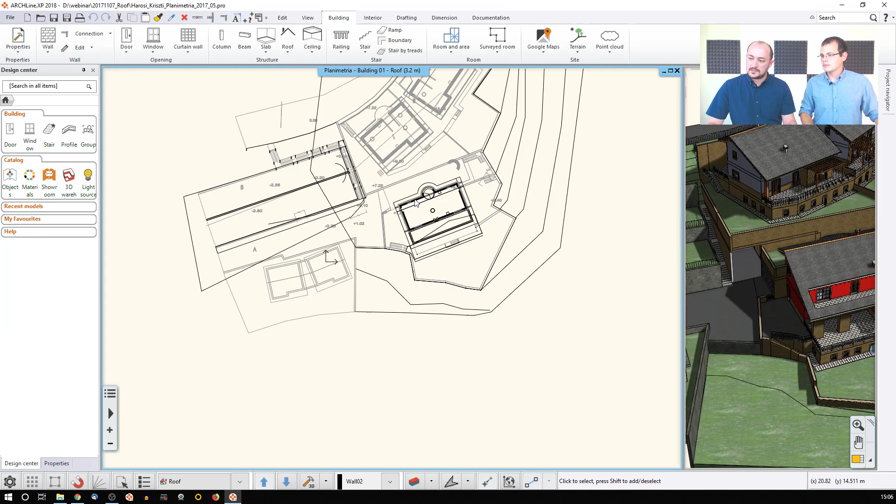So what you see here now, this single building is highlighted, and this is where you can work. This is what you can select. This is what you can edit. I will work on that later.

If I would like to work on this, I need to go to the settings of the levels, the floors. Here I can see these are my floors, and there is a button where you can set up or switch between buildings if you already have existing ones. By default, the software will always create at least one building in the project, called the default building. You can rename those buildings, add new ones, and remove content if you want.

Actually, there is one called the surrounding now, and that contains these tiny buildings, so I just click on that. This way I'm switching to that building, and when I click OK, it's pretty similar to the floor selector itself. Yes, it happens the same way.

You just select the building itself, say OK, and now the software is working on something. This means you can separate your models into several parts, and you can also focus on what to see in the 3D, and this happens here.

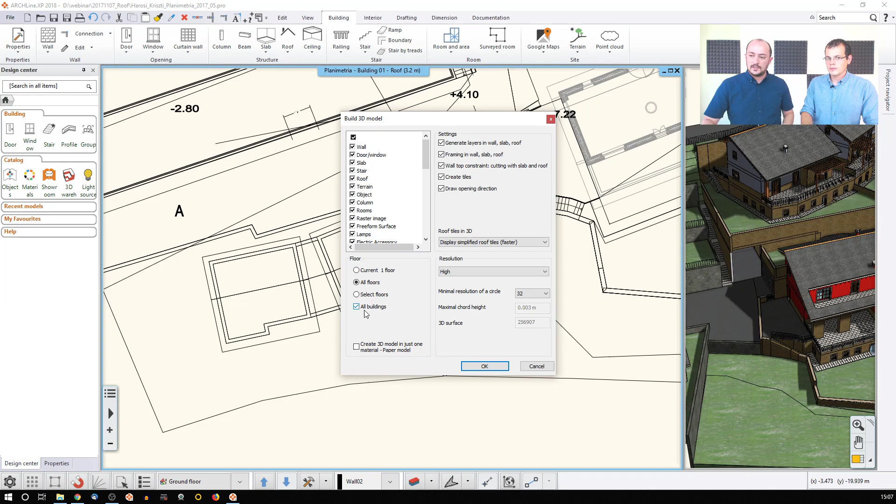With this 3D update button, there is the build 3D model button here, and this allows you to set up whether you'd like to see only one floor, all the floors, or all the buildings. This way, whatever I do, I will always see the full content, the full project. But if it's a large project, or you just want to focus on the single building you're working on, you can disable this all buildings switch, and then you will see only those parts highlighted, that are editable, in front of you in the drawing.

So what are the first steps here, once you have the building selected? Now that the building is selected, I'm waiting for the software to update the 3D, and then I'm able to access the content.

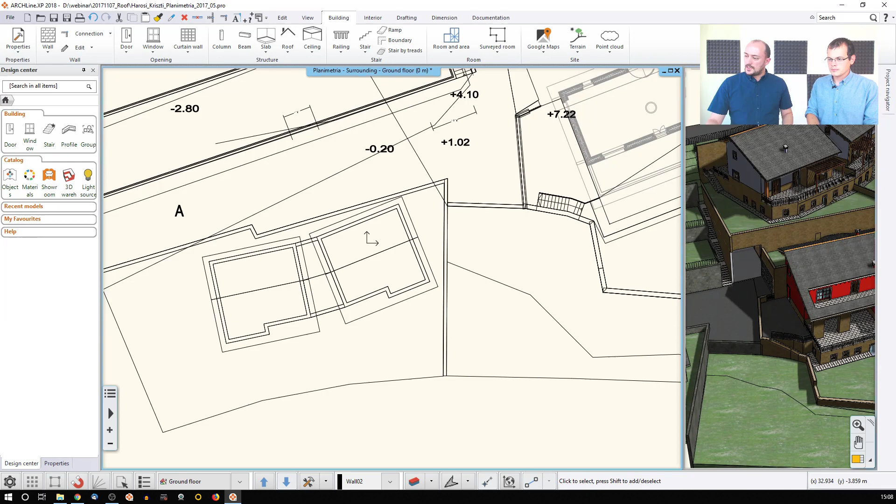Let me quickly go here and show you a few 3D views I have set up, and I will also turn off the shadows for now because I don't need those yet. This we will need later. So I will just quickly turn off the shadows, switch off both, and it's a bit clearer now.

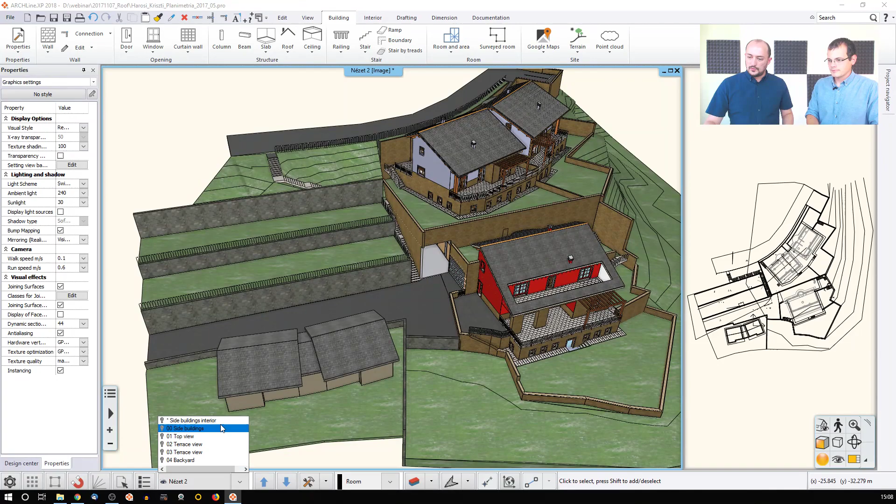I just go to the side buildings view, which I have saved earlier, and it's here, this one. So I will work on this. These roofs were created with the roof tool, either using the automatic tool, which we will cover today, or you can also build roofs roof plane by roof plane, which we will explain in the following session. Today we will just work with the roof pitches, how you can use the survey data, which you just highlighted in the image before.

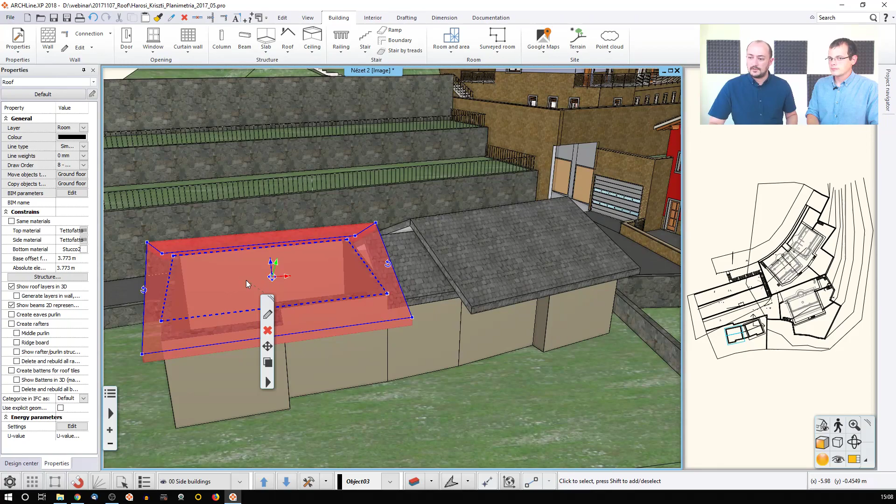We will turn back to that and discuss it in detail. So now to clear this up, I just remove this roof, and now we can see the roof is removed from the 3D, and of course removed from the 2D as well. Let me just focus on this part here, and this is where I will start.

Now, most of the time, or in many situations, you won't work on angled drawings like this. You will work on perpendicular, horizontal, vertical drawings many times. But if it happens, it's actually nothing difficult. You just go and use the roof tool, and either you use the roof shapes, which are predefined tools to easily create a flat roof or an open gable or something else. Just go with this, and in that case you can align your drawing to the current content, and then the predefined shape automatically appears.

Yes, and as you can see, the software will tell you how the roof plane will build up. Once I click now, the software will automatically create a roof with the default settings.

Now there is one thing here, and that's what we see: the roof is not really in connection with the 3D structure. We will cover this a little bit later. So this is what you will see when you create the roof itself.

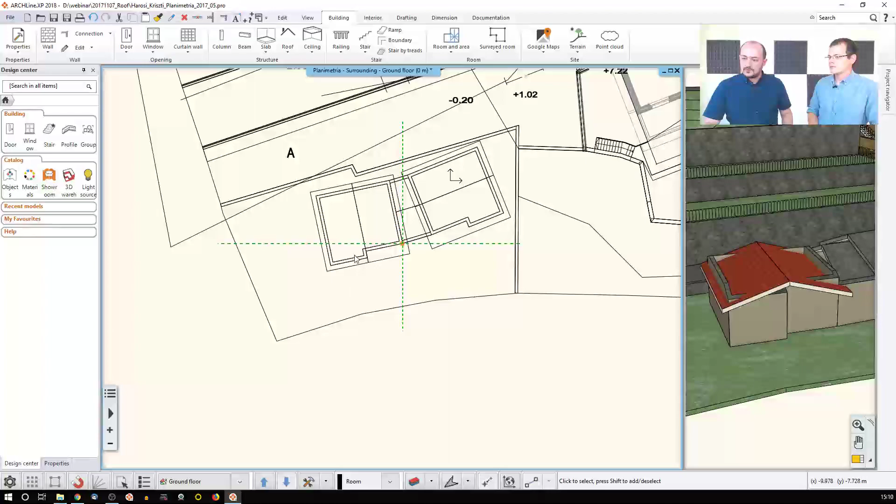Now let me just go back and remove this roof, because this is happening when you work on really simple roofs. But if you have some complex shape, something non-symmetrical, or with specific features, like an L shape, in this case you can use the roof tool, and there is something called the auto roof.

The auto roof comes with a default behavior where you can select currently created walls, and the software will automatically recognize the outer contour of those walls and auto draft a roof on that. That's why we call it an auto roof.

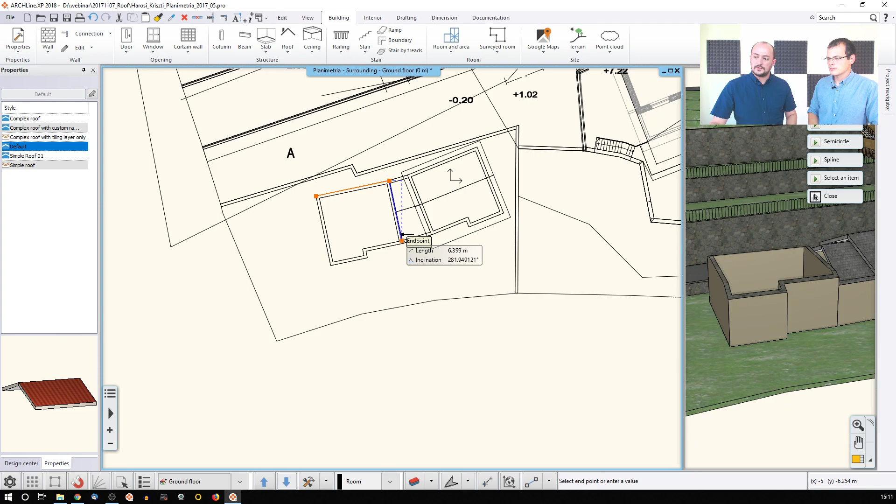So what do you do? You go ahead and select the walls one by one. Either select them, or if I would like to draft it on my own, because for any reason I just would like to pick the points myself, I will go with this polygon option, and then I click usually on the outer contour. This really only determines where the roof planes are attached and how the roof is drafted. It's not that important to be on the external side, but usually it's the external side.

So now I have an automatic roof. As you can see, it already exists in the 2D. I have a preview in the 3D, but it's not existing in the 3D yet. It will, once I hit OK, and then the roof is created here with the default 3D space settings.

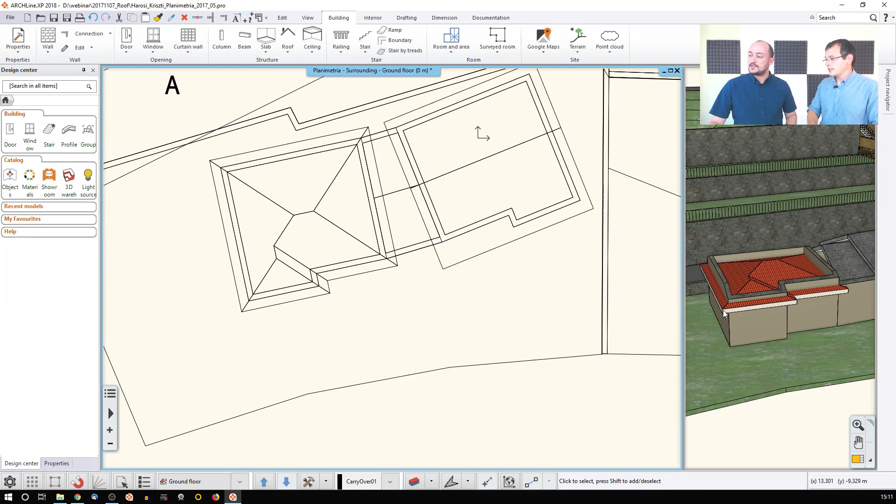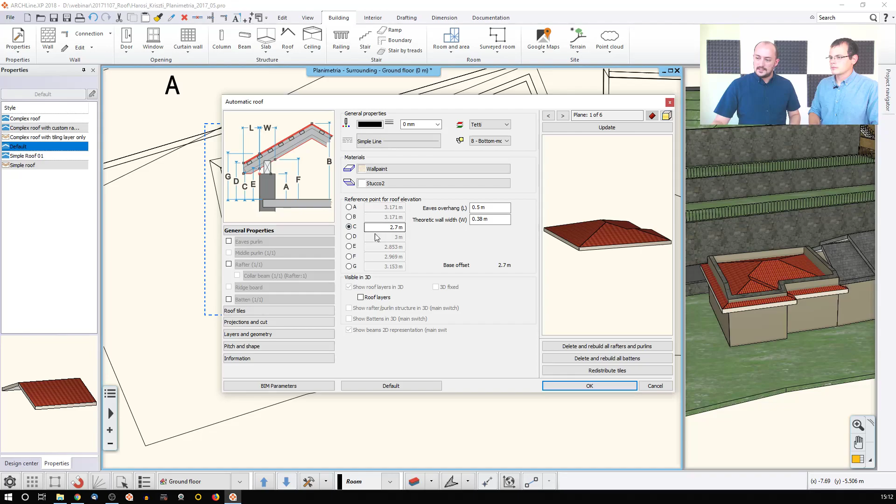Now, what can I change here? There are quite a lot of things I can do. First things first, if I go back to change the settings, I can set up the position of the roof. For example, I can tell where the wall height is, what I can see from inside - this is value F. I can say where the bottom part of the roof is - that's value C. When you click on any of those, you can determine that value, and the reason the rest is grayed out is because once you determine this, it determines all the rest. So you only need to know one of those, and the rest updates automatically.

So the software, based on the settings you already have, is automatically recalculating the 3D shape and the 3D position of the roof based on the contour you have created and based on the angles, which I will cover soon. So this is how you can build it up.

Of course, when you work with these roof shapes - let me just go back to the default - you can also set up something we call a style. The software comes with built-in styles, not only for roofs but also for walls, slabs, and all the rest of the building parts. Styles are names you can use to store all the content and settings, like in case of a roof, the thickness, the material, other properties - it could be anything, and even the BIM parameters.

Now, one thing about styles that we always talk about is that these are not tied to this project, or they can be. So if you want to tie this style to this project, you can do it. In case you send this project to another colleague who uses ARCHLine, they can access the same styles. But you can also make this into a global style, which you can carry on with you, even if you change to another computer.

Just as you mentioned, styles can be exported and imported. So if we are working together on a project in two separate offices, and I create a good roof style that I think will work with that design, I just export it - I don't have to send the whole project.

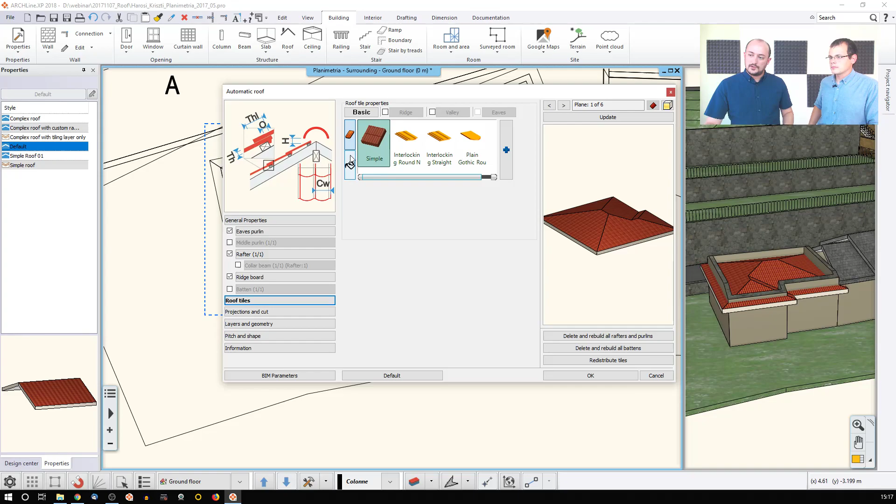Yeah, and if I would like to go further in detail, then I can do that, and I can just enable all the rest of the options. And those materials are something that you can set here. Also, just as we covered in previous sessions, you can bring in new materials, new textures, and if you find a nice photograph or a new texture file online of the roof - should it be like a metal sheet or something like that - you can use that as well.

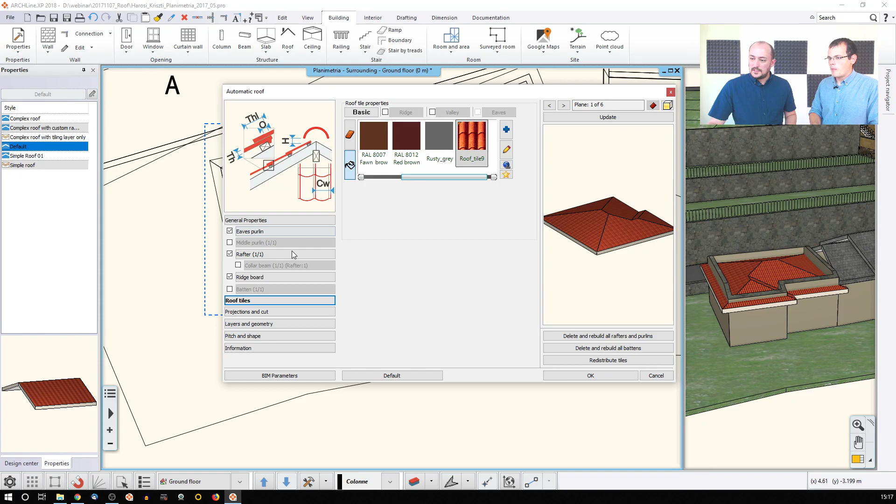So going back to the rafter settings - see, now I already set up the eaves purlin, the rafter, and the ridge board. I enabled them, so if I click on update, I expect them to be visible. Yes, but they are not. So, but they are what not.

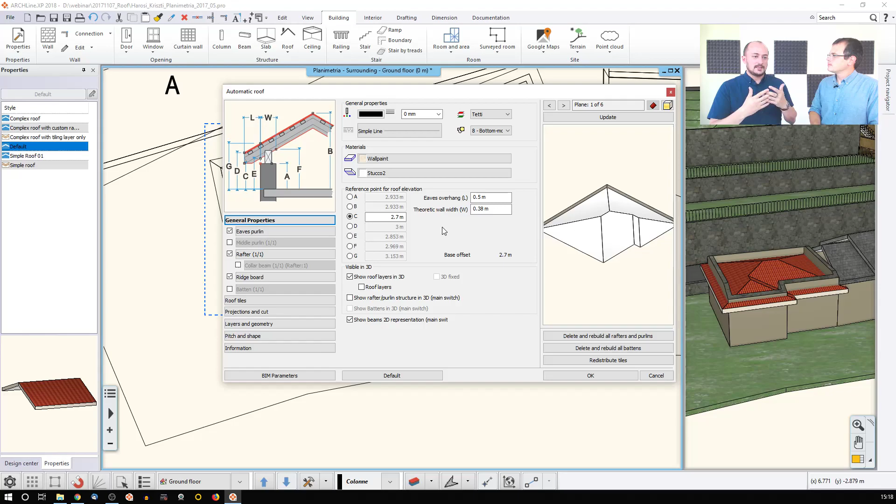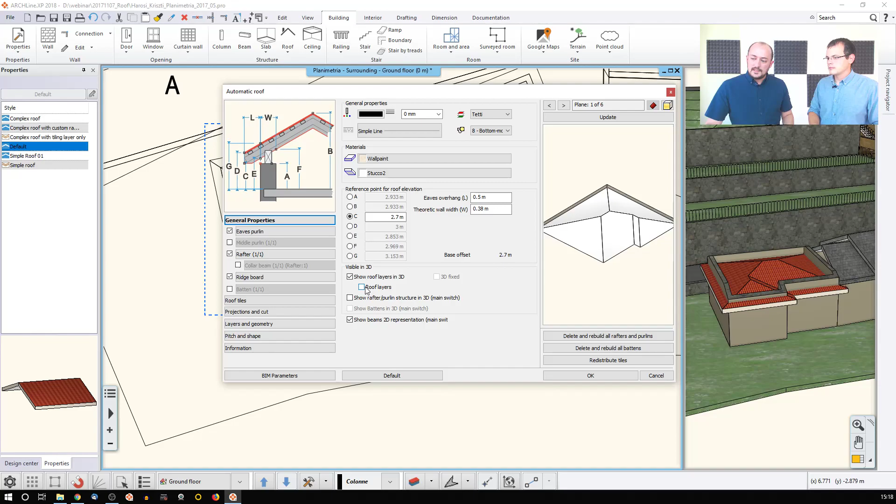This is a setting, because in the design you may want to set up these items, but it's a matter of decision whether you want to actually see them and intersect them, or document them. That setting is on the main page in the general properties. If only the roof layers are visible in 3D, the structural elements won't be visible, so I need to enable roof rafters to see them.

Now they are visible, and as you can see there are roof layers in 3D, but not the detailed layers. There's another setting here, so if I enable this I get a different result. We started from a simplified view and now we're moving towards simply enabling additional details.

When the view is simplified, the structural elements are still there, just hidden. The difference is that you can enable and disable the visibility of these items without destroying the structure you already created, so you don't have to erase them, just disable the visibility, and that's it.

I just enabled this, and here's something interesting: I enabled layers but I only see one single layer, none of the others. The reason is if I go to layers and geometry, I can see there are actually two layers here. One is called roof tile, the other has no name, only materials and thickness. It's not visible because it was created as non-visible, and this last option controls whether it's visible in 3D or not.

So for example, this might just be a cavity or something like that, and in that case you simply disable the visibility of that layer. You can build up a visible layer, an invisible layer, and so on, creating a real structure like the roof structure. This way you can set up how the layers and the structure are created.

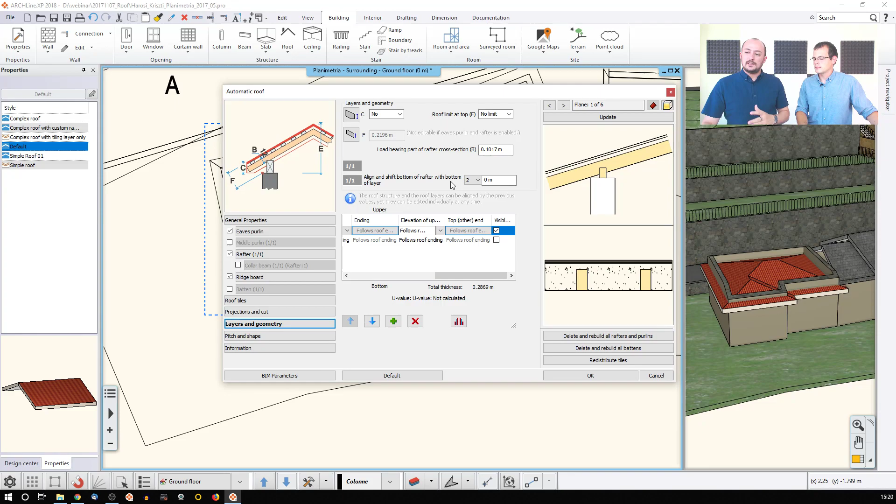This setting tells me that the bottom of the second layer, which is invisible, the air cavity, is aligned to the bottom of the rafter. That's correct because this way I have a proper representation. Whenever I need to change this, we'll go a little deeper in the next session about how it works.

Then I can obviously do that. So I can set up the layers, set up the structure, make them visible or turn them off. I can set all these things into the styles, or I can just go with the default styles and worry about the settings later.

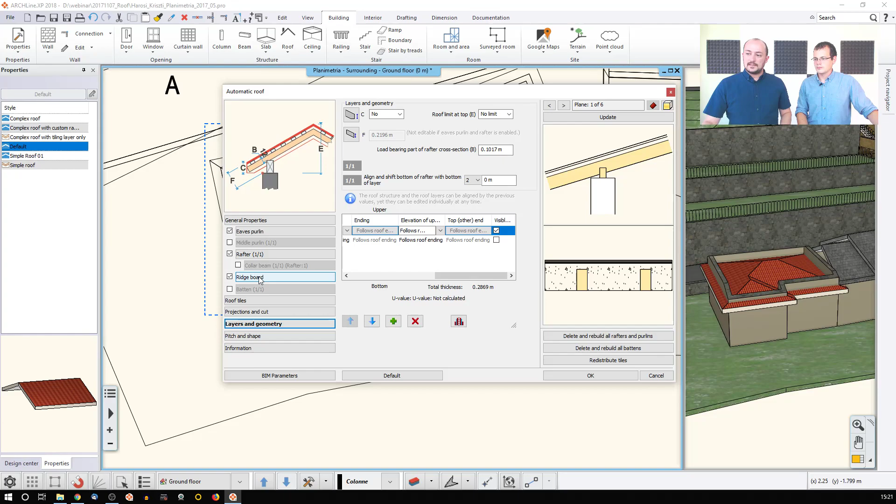At the end, what's also important is how the roof connects with the walls. We're going to touch on this in detail, but we started this discussion by highlighting that now the walls are reaching over the roof, so this is where you can set up where the roof actually cuts the walls.

The default setting here is that the roof should cut everything on its own floor. That means if the roof was drafted on a level where the walls were created, once the walls reach the bottom of the roof, it will automatically cut it. But if that wall comes from another floor, much further below, like from a garage, it can be really tall but will just pass through the roof because it's not coming from the same floor.

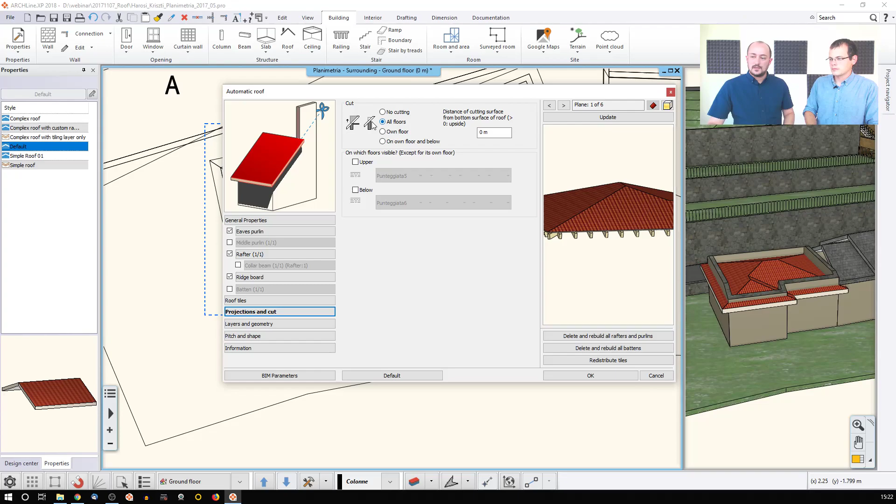If I would like to keep it simple and say that whatever meets the roof should be cut by the roof, I just use this option, the All Floors option, and click OK. Then the software should cut the roofs and the walls, but it's not happening. And there is another reason to that.

By default, the software is trying to keep the project as up to date as possible, but some things could take a few seconds, so the software doesn't stop you. It just does the changes, and whenever you want, you can click on the 3D hammer here, this Quick 3D Model button, to update the model with the current settings. Then the miracle happens when the walls are cut by the roof, because now the software is considering all connections between the structure, and once it's done, as you can see, it's disappearing.

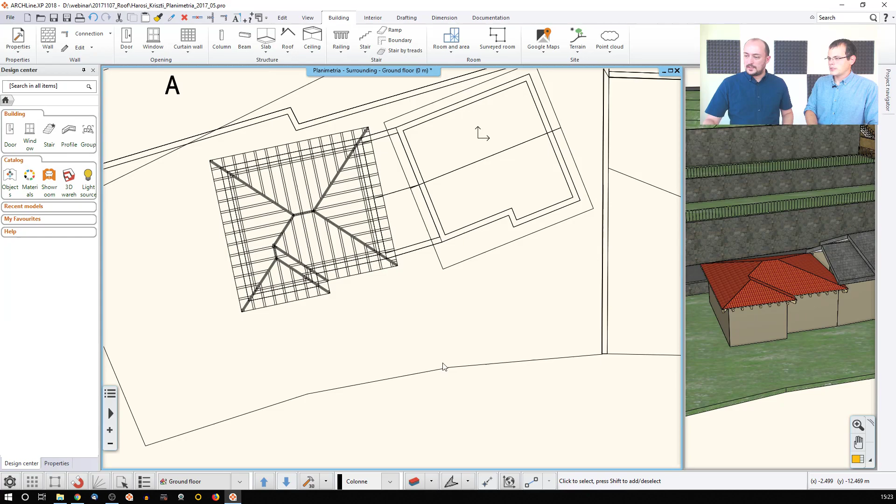So this way you have direct control over when you want to update the 3D model, and that conserves some processing power from your computer.

Remember we talked about the 3D representation and the 2D representation. There's another thing to consider, which is how the roof looks in 2D, whether we like it or not. That's something we can control in the roof settings. In the roof settings dialog, there's an option called Show Beams 2D Representation, and if I disable that, I can just hit OK.

Now the software represents the roof simply in 2D, but complex in 3D. It's not lost, you just disable the visibility, just as with other things. So instead of switching off all the elements individually, there's one main switch called the 2D visibility of the beams. The software calls everything inside the roof a beam, like a rafter or another structural element. So if you disable that, you'll still see it happening in 3D, but you won't see the content appearing in 2D.

There's another thing that's good to know about. If I disable this setting here and update the content, I can visualize the structure only, which is also interesting when you'd like to represent the building in detail, or make an interesting render or an axonometric drawing — this could be very useful.

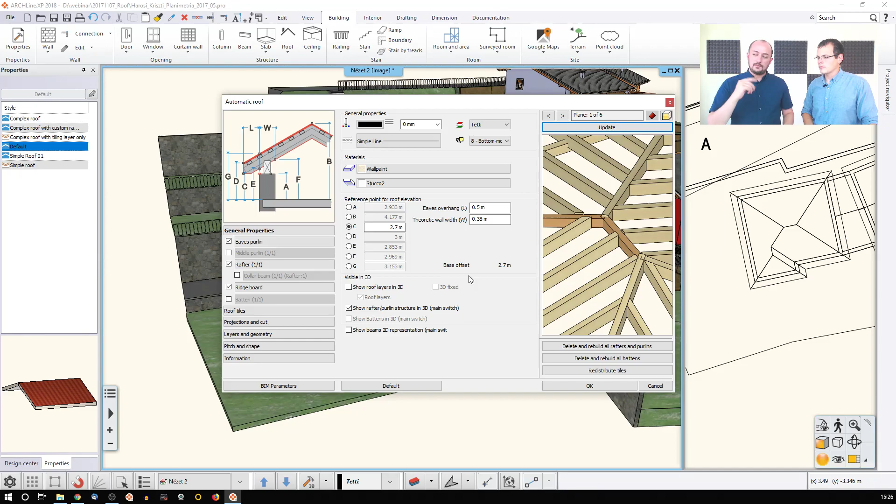We talked about the general properties, structure, layers, cutting of the other parts, and also the projections — how the layers and the projection with the walls are combined together. There's one thing I did not cover, which is the pitch and shape, and for that reason I think I will go back to the simple representation of this roof.

Let me just enable this and disable this and this. Update. So now I have this simple roof representation. And then let's talk about how the roof pitch setting works, which is here in the Pitch and Shape section.

As you can see, the roof 2D here is aligned the same way as it is in the original drawing. This helps on the floor plan, finding the proper orientation, how it's set up.

So how can I change that? If I click on any of those roof planes, I can see their pitch and whether they are hipped or gable end or something like that.

So if I would like to make this roof plane disappear like an open end, I should click on it and say that this is a gable end. Update, and then now this is what happens here.

Let's do the same thing with this here. Again, I just click and say, okay, this should be a gable end. Update, and now this is what I see. Let's click OK. It's taking shape one roof plane at a time. So this is how you can do that.

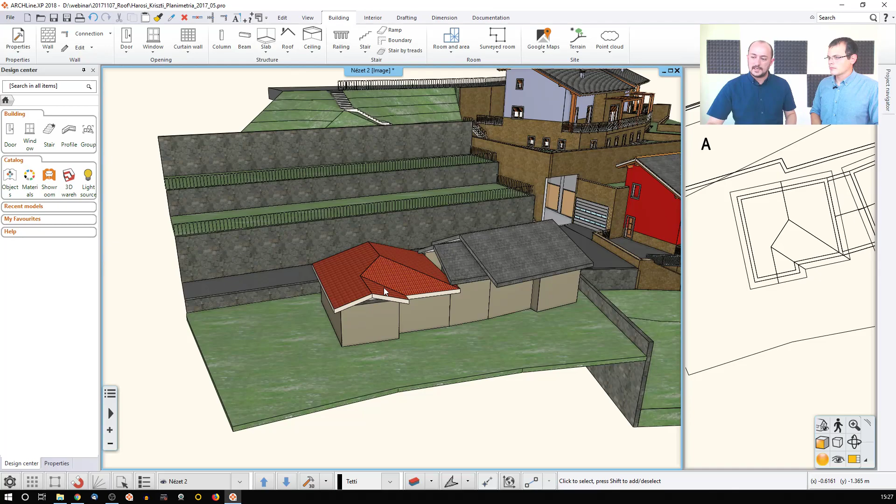But of course, if you would like to change the overall pitch of the full roof, because it's like a taller roof or high-pitched roof, you just go to the settings, find the pitch and shape, select any of those roof shapes that you can select, and there's an important thing here: you can actually select a roof plane which is not visible as well.

So if for any reason I would like to go back and turn this back to hip, I can just do that and it will go back.

So disabling this, update. Going back to the original topic, how to change the pitch of all the planes, I can come here and say this should be something around 30 degrees, and apply this for all the planes. Update, and then the software will make changes for all the planes which are not disabled. This way the full roof is changed.

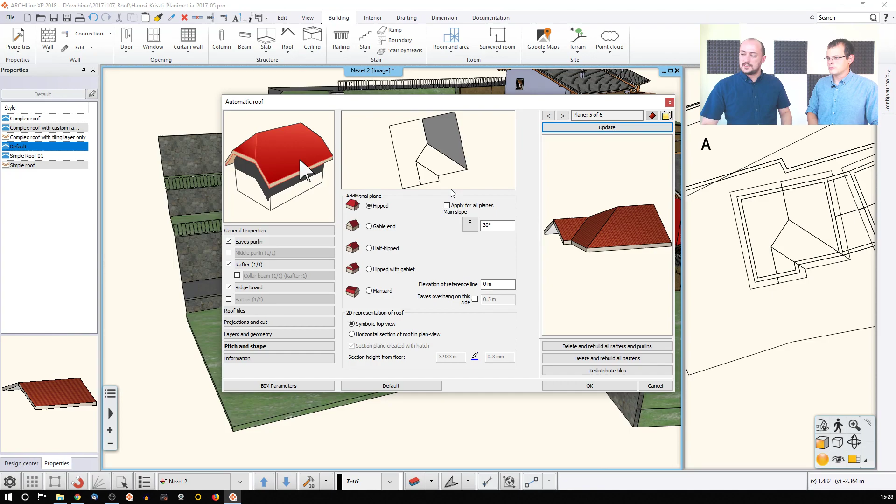I click OK, and now I have a taller roof. Considering this, there is no updated wall roof connection yet, which is for two reasons. One is that sometimes, like in this case, the wall is simply not tall enough.

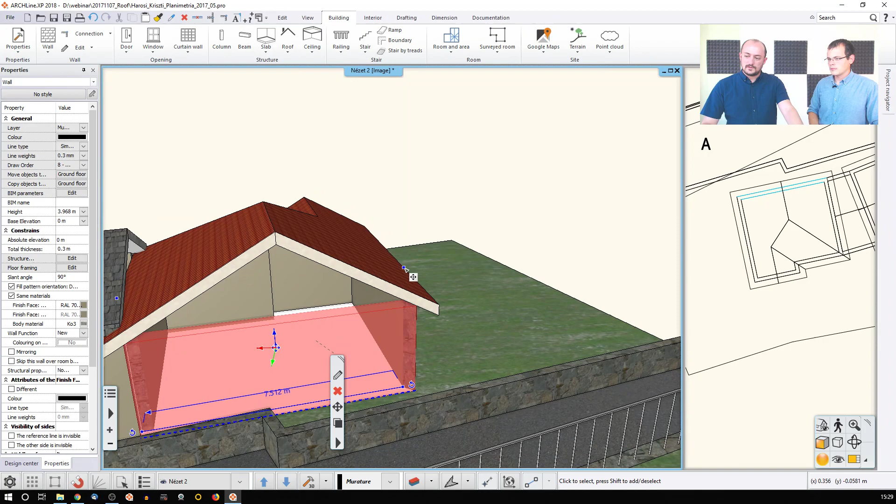It's only coming up to this side, so I can just click here and say change height, elevate it to something like this, and then it will solve itself. Or because of the automated cutting, you just need to elevate its height and it cuts.

And the other way around, if I'm sure that this is actually something that should happen there, but it's not happening, I just click on the 3D update, refreshing the 3D, wait a little while, and then the software will update the changes.

Now, I think this is the time when we could talk about what happens if you already have survey data available.

So it might happen, but now we were just coming up with the numbers. Every now and then, especially if you're working on locations which are being refurbished or renovated, you already have some survey data based on which you can work. So what happens if you already have some data available, how you can utilize that?

Well, actually, there are two ways of making the survey. One is when you go outside and you survey the roof from outside, the outer shapes of the roof planes, that you can do as well.

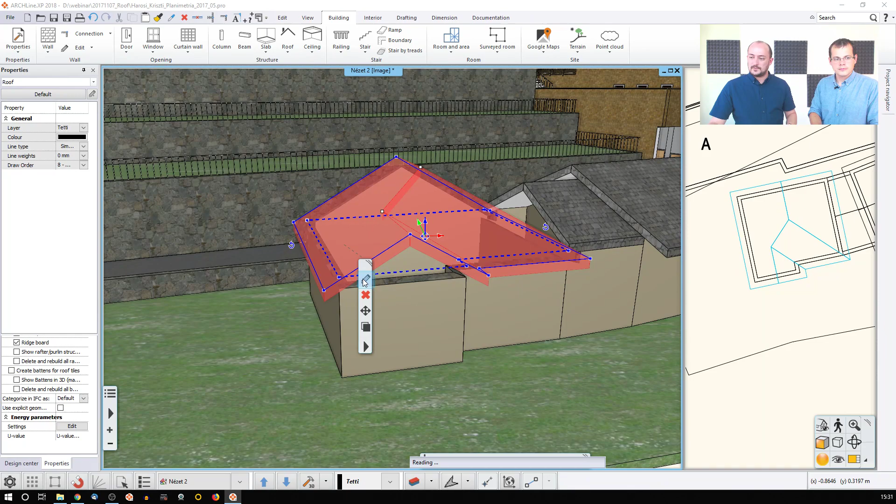But at least it is something you can use to calculate the pitch. The good thing is you don't even have to calculate this within Archline. I'll just remember these values, or if I forget, I'll bring back this image. I'm just going to open it up again.

So there is this roof, and there was the page about the pitch and shape. Here, as you can see, there is a value. If I calculate it mathematically, what's the angle, I can just type it here, but I don't want to. In that case, I just click here, and I can change the method of how the slope is given into the software. One is the percentage, and the other one is for this specific purpose.

Oh, okay, so it's like a Pythagorean environment - as long as you know the two sides of the triangle, you can calculate the angles, right? I hope it's visible enough on the stream. Let me just describe: there is A/B written down. A is the vertical part, and B is the horizontal part. So if I remember properly - vertical per horizontal - I should give first the shorter one, which was 1.7, and the other one was 1.9.

One side note here: keep this space in between the operator and the value, okay? Because Archline actually understands every input as a value. So if you say 1/2 without the spaces, the software will understand that you would like to say 0.5, because 1/2 is 0.5 - it's going to treat it as a fraction, dividing 1 by 2. But if you keep these spaces here, then you tell it that you have one value and another value, and you should use these to calculate the pitch of this roof shape.

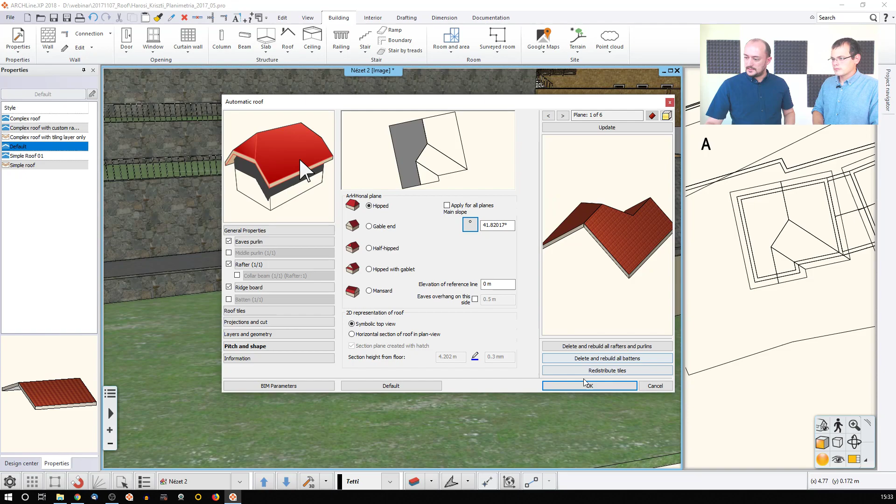So if I just go there, now the software actually calculated that this was 41 point something. If I just click update, now as you can see, it is a higher pitch - but only on one roof plane. Still, we can use this apply for all planes option, and I can click update, and then all the roof planes are automatically updated. If I click OK, now we have this happening.

So this is one scenario. It's very good that you show that the 3D updates automatically in these kinds of scenarios. Whenever it doesn't, you just have to hit the 3D hammer.

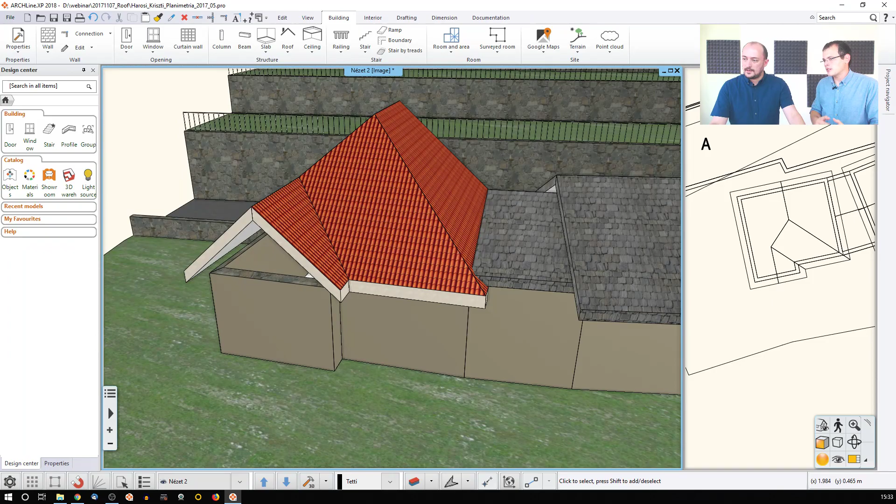Now, what about other editing tools? What I'm mostly thinking of is how you can get these three roof parts together - there's a huge gap, so how are you going to bridge that? Let's talk about the roof editing tools that we have.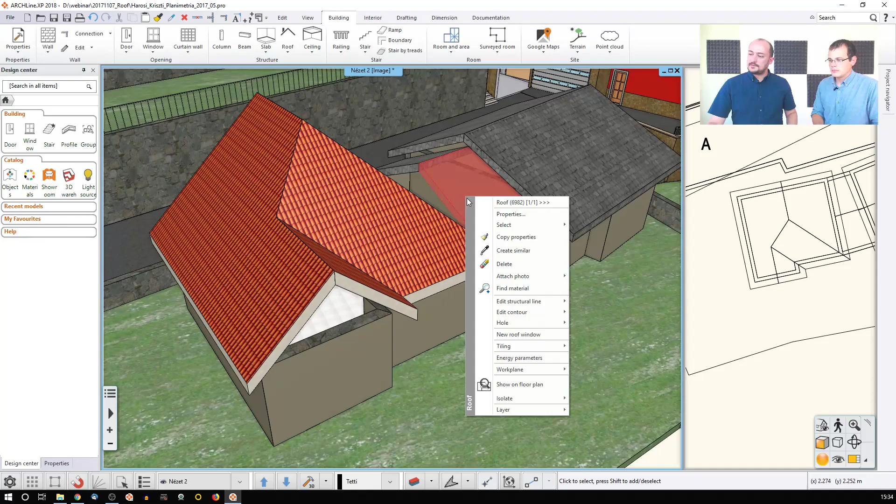So there is this roof. First, before we go on, let me make it visually closer to this other one. I quickly find this material here, which is this one, and I drag and drop it here, and I say to replace this material with another on this object here and here. Now they are visually similar. I could do the same thing by simply saving this as a style and then applying it to the other roof itself.

But now that I have these, sometimes it happens that you would like to combine two different roofs, because the roof is either so complex that you cannot simply draft it with one roof. As you can see, if you have one auto roof, the whole point of using an auto roof is that it automatically creates the connections between the roof planes. But if I have one roof and another one, they are not automatically combined - there's a reason to that. There's usually a design option you can choose whether you'd like to do that or not.

So let me just try to combine them visually first. This roof plane itself, this complex shape, is this one here on the 2D.

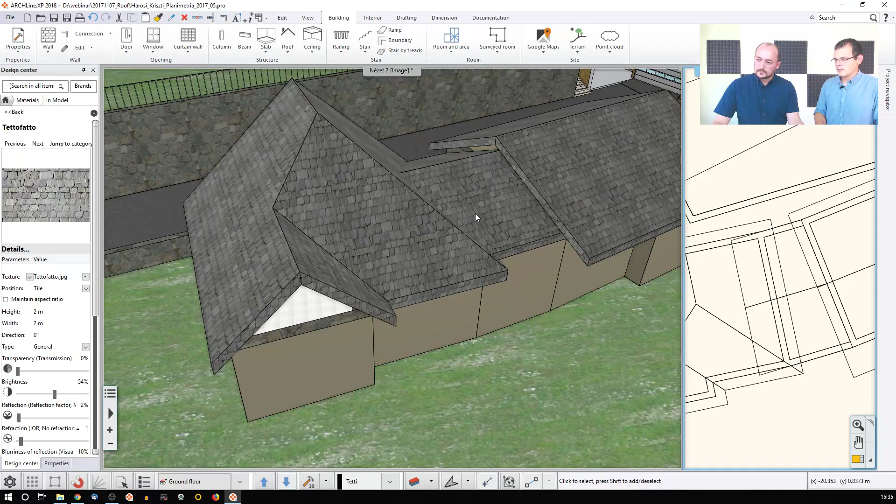So now if I click and try to enlarge it, I click here and say I would like to offset it with a certain value, like this. So now it's larger, and as I can see, it's intersecting the other roof nicely.

And this is what we see from the outside. But from the inside, it's not the best result because it reaches in. So they are actually not meeting each other, they are just simply overlapping each other.

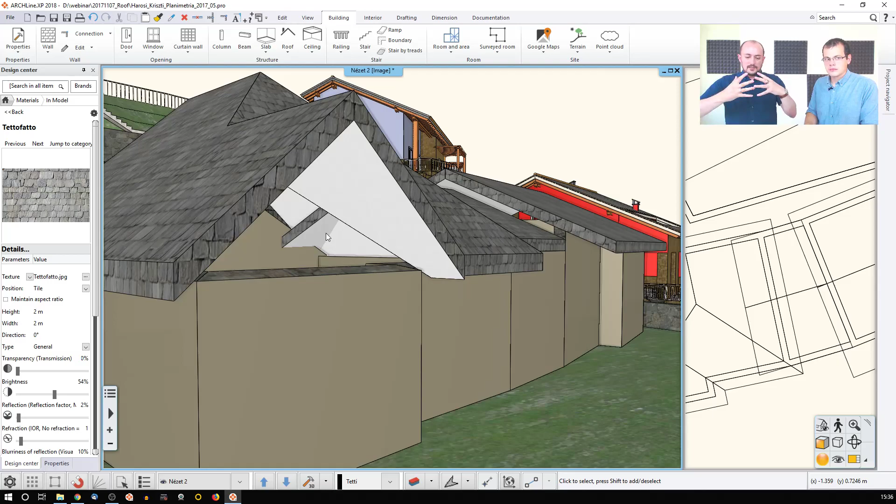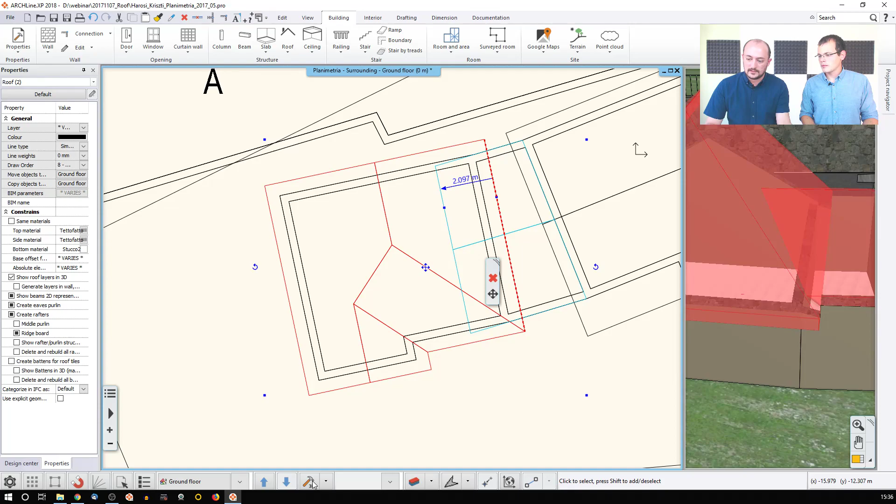So if I would like to intersect them themselves, I need to use a specific tool for that, called the info tool. Let me just try to align this. It will look nice. Then I click here and here to further highlight it, and then click on the 3D rebuild, and this makes only these two items visible in the 3D.

Of course the rest of the project still exists, but now I can just focus on this problem. So the issue is that I need to find where these planes meet each other and then cut the rest of the excess roof parts. So how to do that?

If you already have these two roofs, click on the roof and use the local menu, the context sensitive menu, and there you can find something called info. There's this intersection of two roofs - the other one is for simpler reasons, but now this is what we need.

Then I click on the other roof which is taking part in this meeting, and now you see this line drafted automatically. This is just a helper, so they are not intersected automatically - it's just a helper, and I can do whatever I want with this information. This is just a polyline, right?

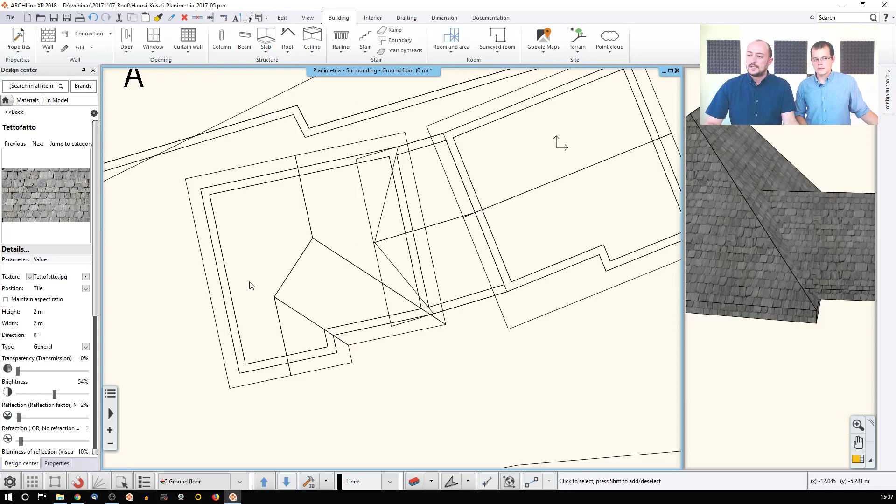Yeah, that's just a polyline. As you can see, it's nothing 3D, it's just a polyline at the left-hand side, the software is telling me. So sometimes I even turn it to red just to see that this is really just a draft line here. So how to use this information?

First things first, I click on the smaller roof, for example, and tell the software that I should actually cut off these parts. There is one tool you can use to chop off parts or punch holes into the roof, and that's the hole tool in the roof. You go to the local setting and say you would like to create a hole, then simply follow that contour.

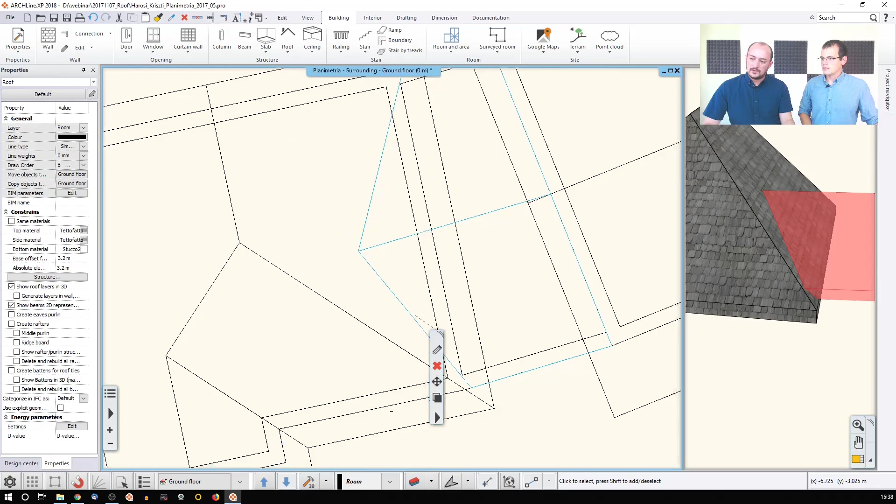Follow along the edges of the original roof and the common part, and once that's done, the software will actually remove the excess part. Now, this dashed line I will explain later - what we need to take into consideration is the solid line. But now only one roof is actually trimmed, the other part is still there, so there's no transition from one to the other.

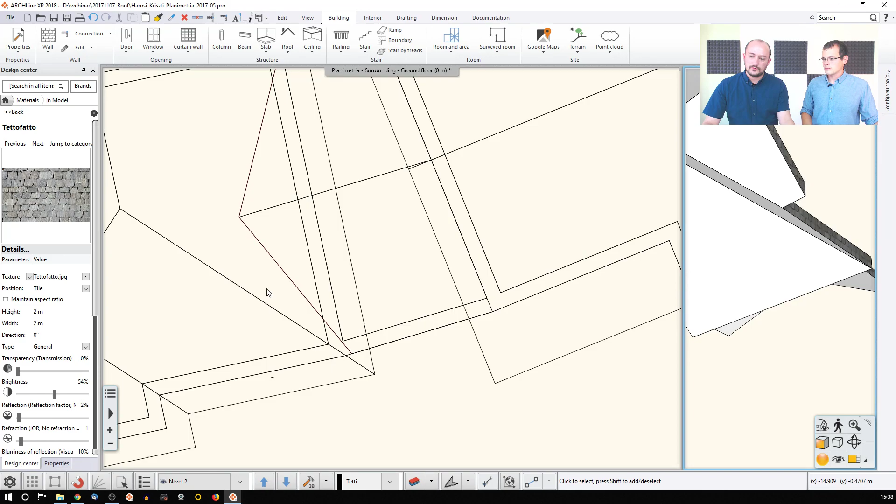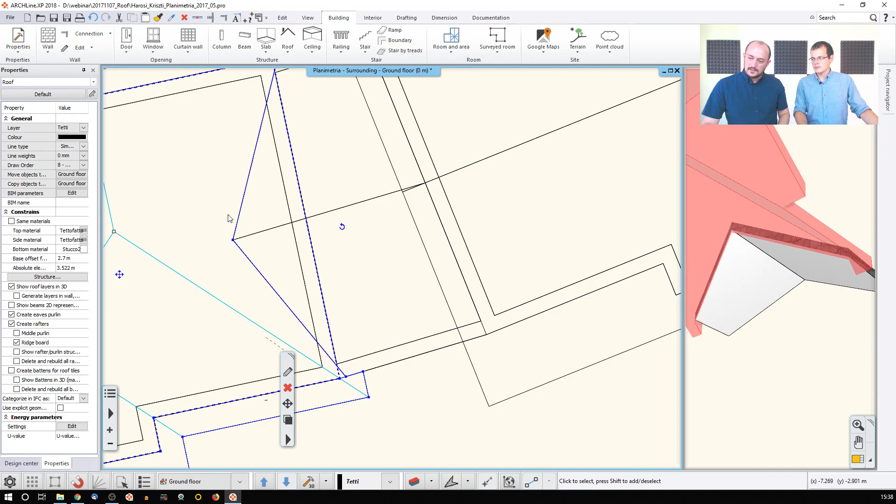Sometimes it's enough, because if I wanted this, then I'm done. But if this is in use and inhabited or something, and I would like to pass from one roof part under to the other, then I just need to repeat this whole thing with the other roof, using create hole again. I simply follow the common parts and the edges of this other side of the roof, and when I'm done, they are nicely joined together here in the 3D, as you can see.

So this is what happens now. Perfect, so that's how you can trim the roof parts together, and the rest is only the setting of the same thicknesses and so on. If you still have some geometric issues, like a gap coming off or something like that, it's usually because you don't use the same settings. You just need to make them common, and then the software will work fine.

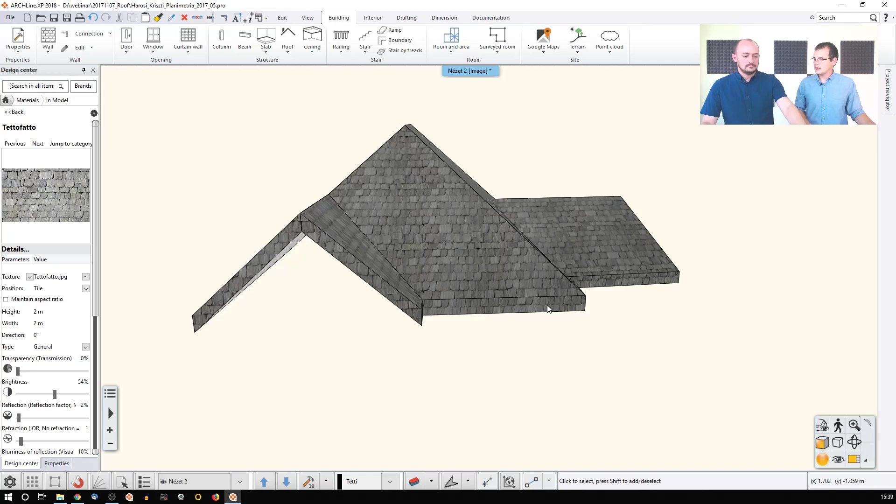You mentioned that you're going to talk about the dashed lines and solid lines, how they differ, and also there's another place where we could illustrate the hole cutting tool on the roof parts. Yes, if you could show that. Yes, so talking first about the differences between these contours - let me just use a simple example, and then we will go to the more detailed introduction.

So as you can see here, there's clearly a dashed part and a solid line part, which is always the case. Even if you only see one, that means they are overlapping each other. By default, you will have this outer contour and the inner contour. The inner contour is what we call the structural contour.

This is what the software uses to draft the roof itself, and it's equal to the lines you drafted when you created the automatic roof or the roof shape itself. This is why the dash line here follows the outer lines of my walls, because that's where I clicked, and here it's different. The outer contour is the roof plane shape.

Now let me demonstrate quickly what's the difference between the two. I'm changing this edge, actually inserting a node here by simply clicking somewhere. See, now the roof plane has changed, and this is how it has changed.

So that's an extension. That's how you create extra overhangs or extensions, or some fancy contour or something like this.

If I do it the other way around, and click here on this one, and do the same thing—insert a node, about the same size, just stretch it out—then the whole roof structure itself changes. Because now I broke up this part here, and I told the software that there should be a plane here, another plane here, and another here. So this is how the roof will understand the changes in case I change the structural contour.

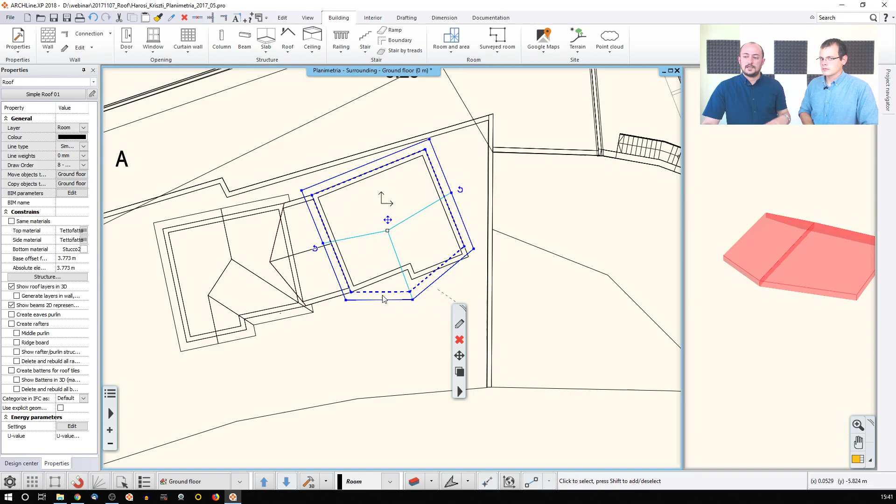So that's how you can actually break up one roof piece into several smaller segments.

Let me just quickly change the building itself, because we will work here on this one. I was just telling you that if you want to create a shape like that one,

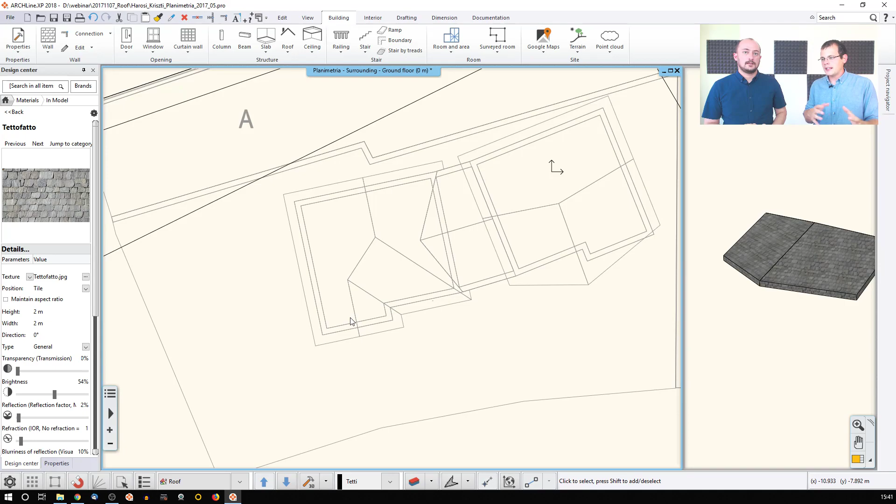you can either, as we discussed, start with the auto-defined roof tool and adjust the pitch and shape until you end up with something like that. But if you realize that some of the planes are missing, that's how you can add them.

And in connection to what we just discussed, together with what you just told, you can actually combine a site survey measurement with the knowledge we'll cover in the following session, so you can build up a roof plane by plane when that's necessary.

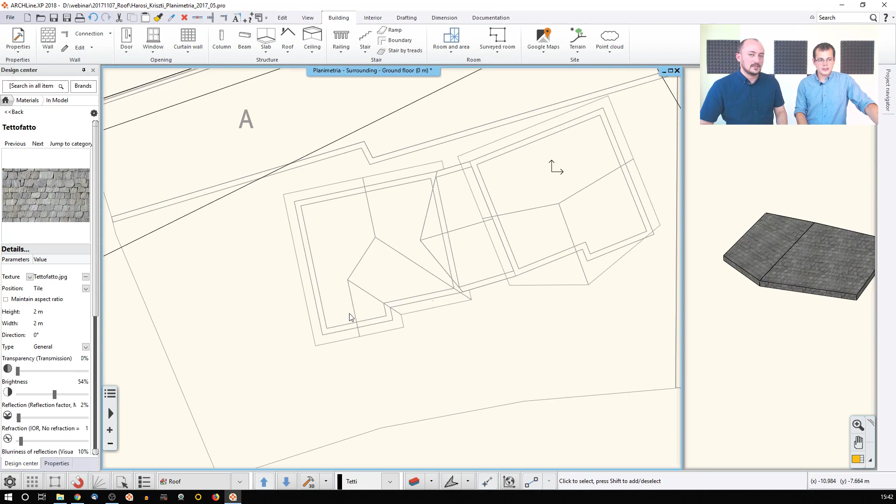That requires a bit more work, but sometimes it's just something you cannot avoid. In that case, if you cannot use the auto roof for any reason, there is still the option to build the roof plane by plane.

So I've actually just loaded this other building part. Here we can discuss partially the same things and a little bit of new things, and that's how we can set up a roof above this part here.

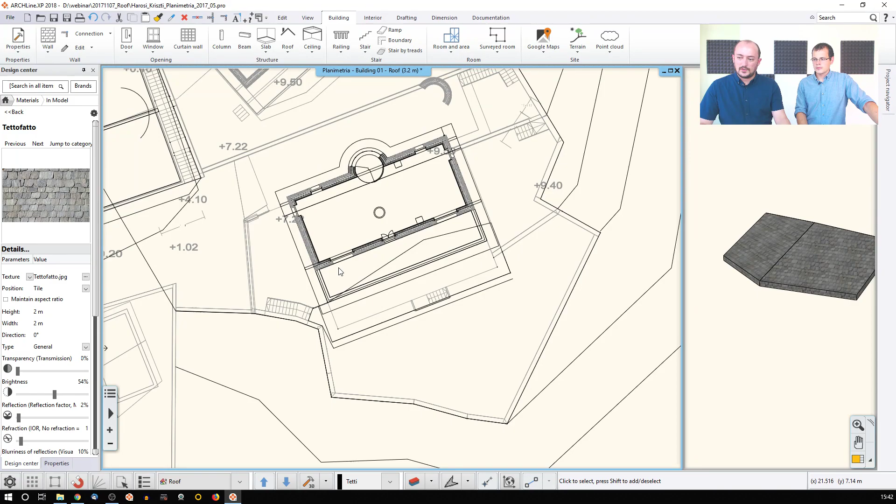Let me just build up the 3D model, but in this case only this building part with all its floors. That's another good tip to actually conserve processing power—just build up the things you want to work on. So we won't see all the details of this project now, only the ones I'm interested in, and it's here, this one.

So I'm about to create a roof shape like this to show how something like this is created. First I select it and erase it, and then let's just draft it using the same tools here.

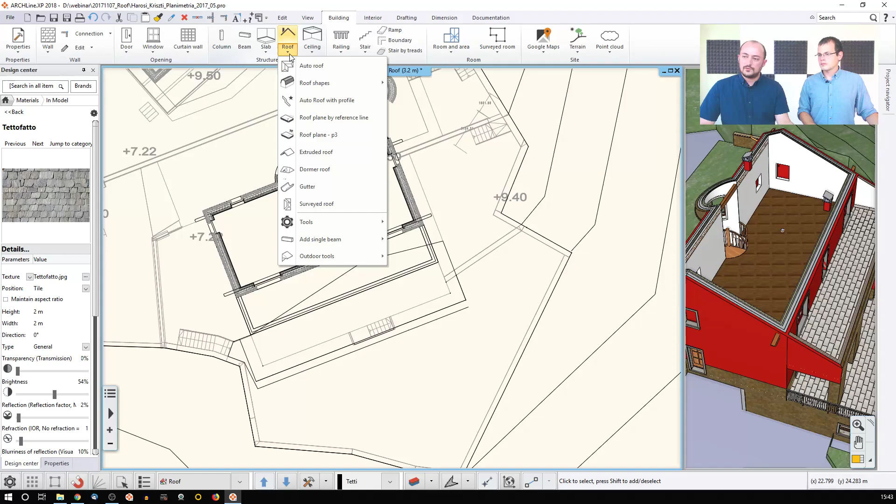So first things first, let's just go to the roof tool, use the auto roof, and there's this rectangle—I think that will be fine. And I just click on this edge, and I completely cover the whole part here.

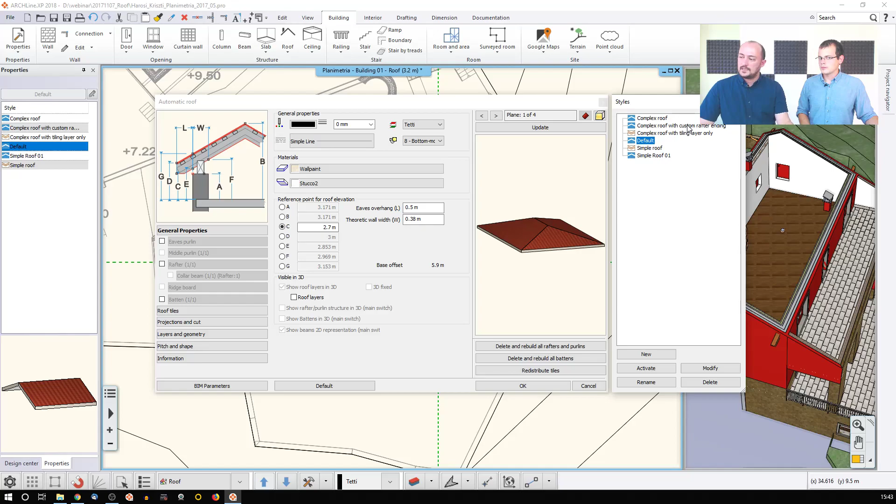Then, using the previous knowledge we already had, I just go and set up the settings, or simply pick one of these settings, and I will actually go with this one here today. I don't want to spend time setting up all the rest of the details.

See, there is this overhang, and this actually tells me how far the roof will stretch out from the contour I've created. And I would like to set up a different setting for the pitch and shape on this edge.

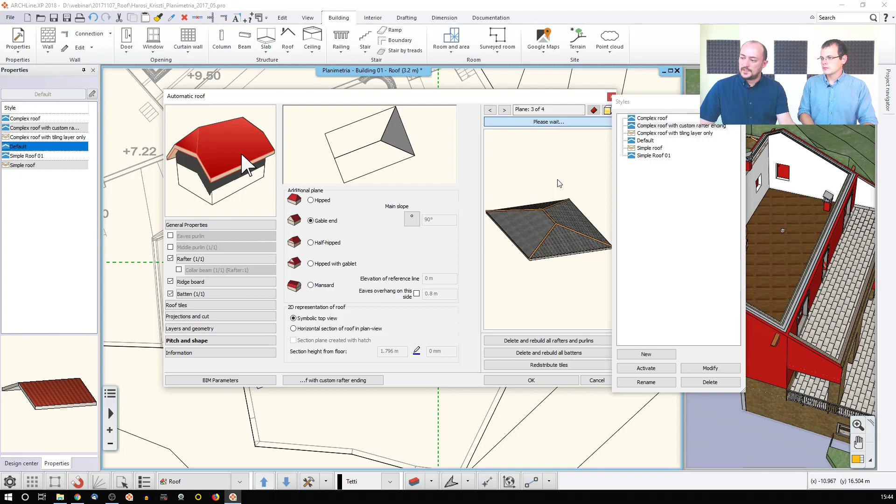I would like to turn this into a gable end and turn this into a gable end too, update—and how do you make this into an asymmetric roof part?

Because it is asymmetric. Yeah, it should be actually, as we can see now. Let me just enlarge this. So the pitch is not correct, and the center is here, and it should be here.

In that case, there are two options. One is that you can draft a larger roof and cut off the rest, because this is how the original was created. Or there's another setting I'm about to show, where you can elevate one side of the roof to make it asymmetrical, because the roof is always built up on contour lines, and you can elevate one of those lines. Sometimes this is more useful.

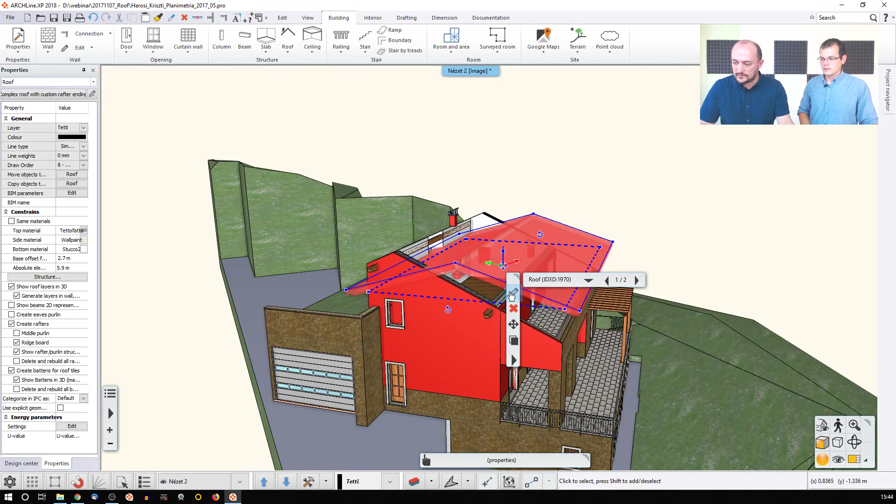So talking about this, let me just change the roof pitch first. I think it's around 20 or 22 or so, and let's just apply this for the whole roof.

And then talking about this elevation, as you can see, there is this elevation of the reference line. Now I'm about to elevate the reference line. Let me just go back to the 2D, because I think this will be more informative. So, here - what is the reference line? The reference line is this, the dashed line, the structural line.

Now I can only change the elevation of the reference line at 2 levels, because I have 2 planes, but the rest is turned off. If I have more, then I can do them plane by plane.

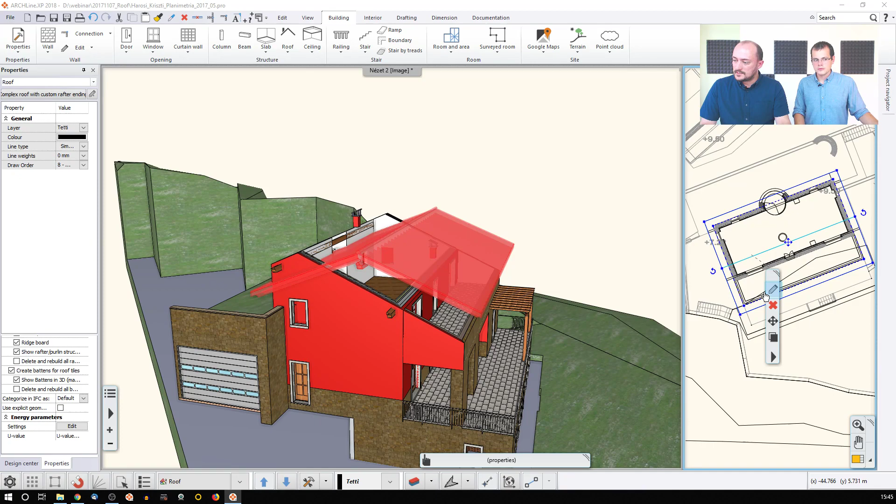So I just click here, go to the details, there's this pitch and shape, and I'm about to change this one here. This should be elevated, I don't know, 1.5 or even more compared to the other one.

Yes, so this is actually pushing it higher, between the two. Yes, yes. But I think the proper value should be around 3 or something.

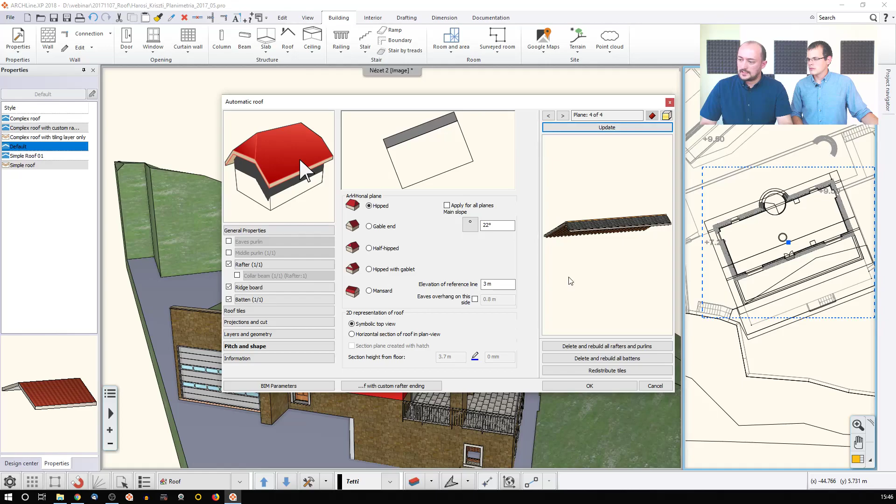So in this case, this is what I end up with. And then this happens, and now I can push back the whole thing below, which I can either do visually. This happens when I'm still in the conceptual phase and I don't have values I'd like to use yet - I just want to align them together to match.

And if this happens, it's because on the right hand side there are reference points, and the software is now sticking to those points, which is okay because this guarantees that I can work properly when I want to snap points to something else. But in this situation, it's not quite useful, because it keeps jumping off.

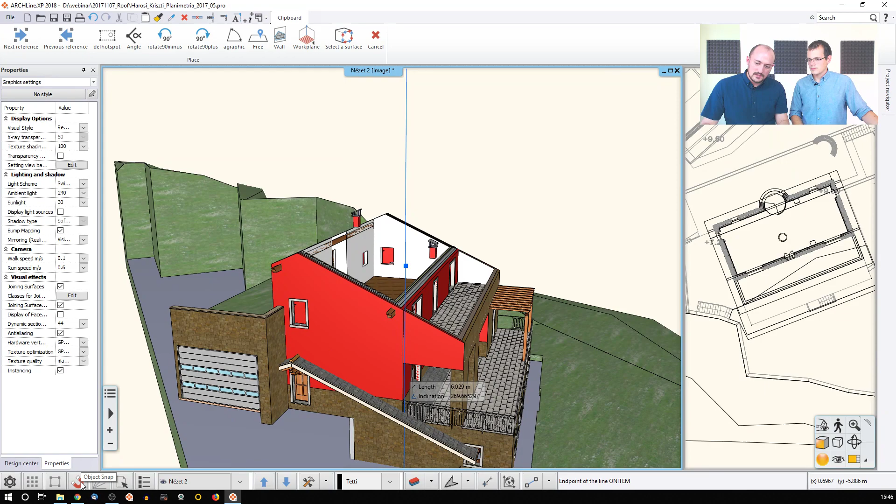In this case, I just turn off the object snap for a while, and then I can easily graphically move it someplace else. When I find the proper position, I just click, and then turn this back on, because from this point on I need it.

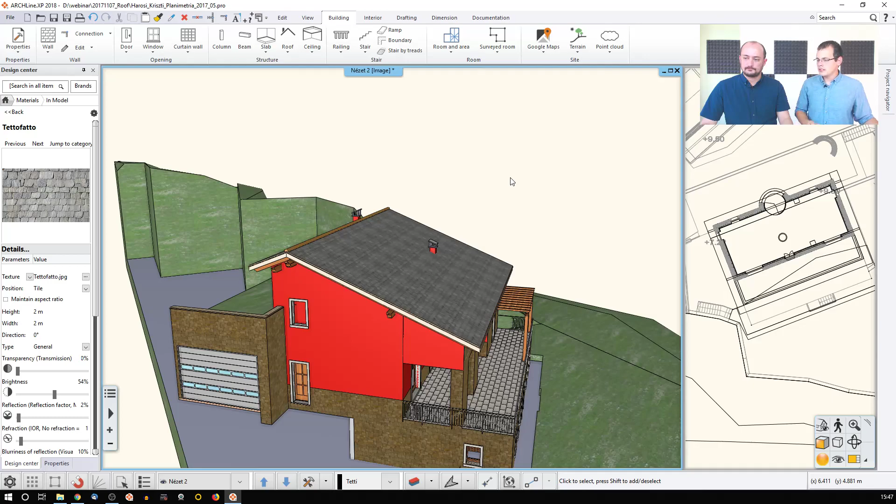Now there are actually 2 details here we could use to illustrate what we just discussed. One is the cutout for the terrace, the other is the overhang just above the entrance. So let's start with whichever - let's start with the hole, since that's what we created last time, so it's easy to remember.

Now just go and select the roof, go to the settings, use the hole, and there's the create hole option, then you just follow the contours. This could be way more complex, but let's keep it simple. I just draft a rectangle, and that's what happens on the right hand side - now we have a nice opening to let sunshine into the interior.

The other thing we discussed here is a matter of choice what I do. I can change the structural contour, inserting 2 nodes here, turning this into a curved edge - but this cannot be done; perhaps the roof shape would be something that cannot be drafted, so I just make it smaller or something like that. So this is what happens - it's a completely different roof shape.

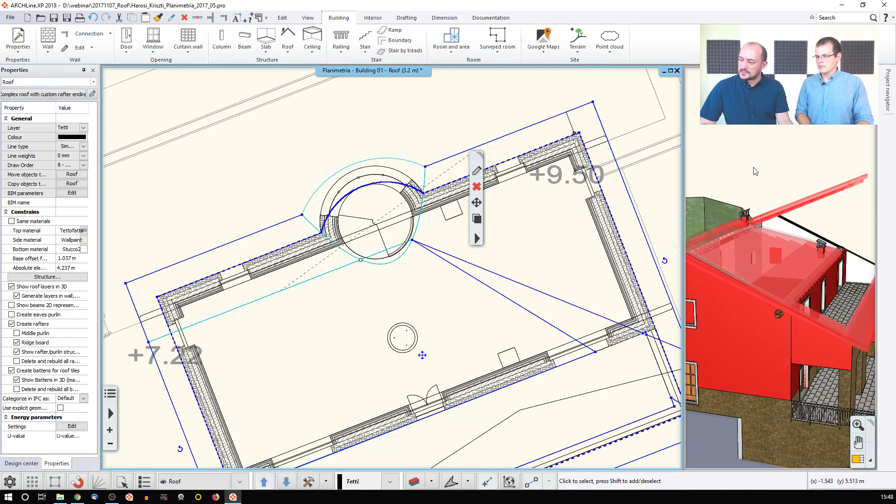It's now not even useful for me. So what I do, I just go back, and back, and back. What I really want to do is just cover this like an extension of this roof shape here, not like a cone or something like that.

So in that case, I just click here and insert a node, insert another node here. Sometimes I even use draft lines to mark the intersection of these points to create a helper line, and I just extend this to a certain value, and then it's already covered.

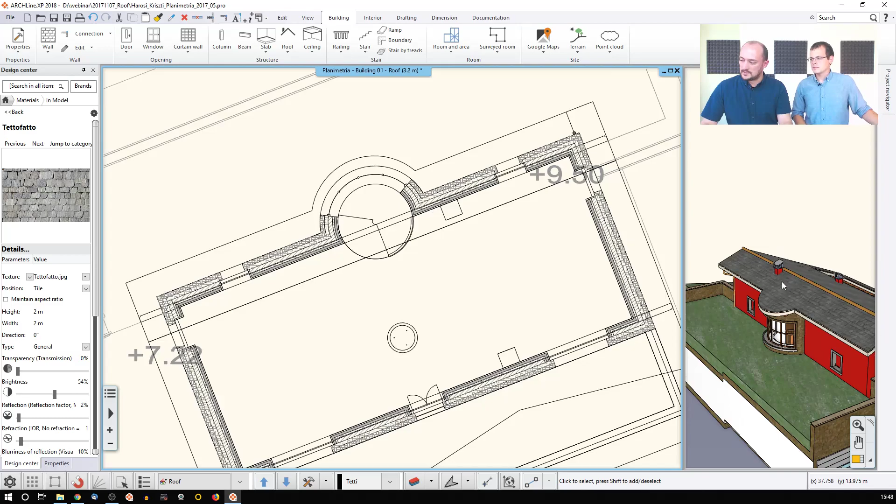Perfect. Now that summarizes the editing tools, but let's talk about additional roof parts. Mainly what I'm thinking of are the chimneys and other objects, for instance gutters and things like that. So how do we add these elements to the drawing that we have?

Well, one solution to create a chimney, for example, is that if it's built above walls, then you can just drop the walls and make sure that they're coming through the roof. Remember we talked about how the roofs are cutting or not cutting the walls, so this can be something you can set up. Or you can simply cut a hole into the roof and make sure the walls are coming off. There's another solution to that, which is the object solution.

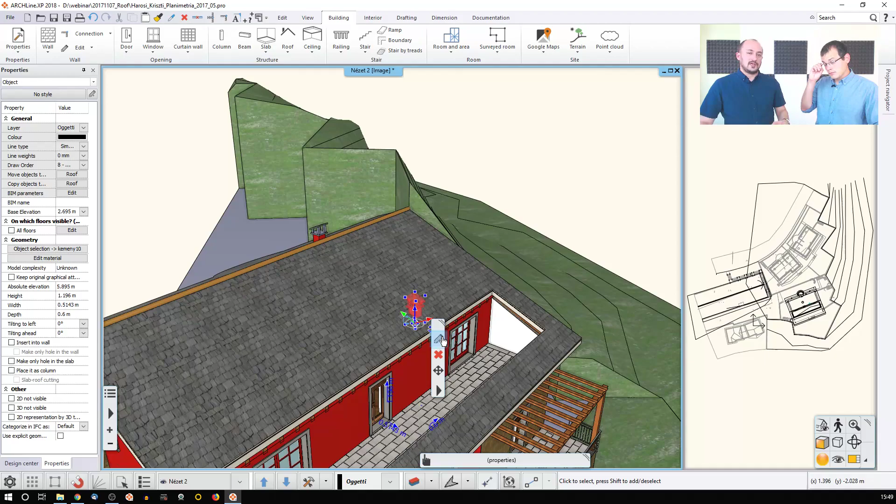When you place this chimney as one parametric object, this is how it was done. If I go to the settings, as you can see, there are chimney objects built into ARCHLine, and whenever you select any of these, you can go to these settings and make changes. You can change the size, the material, and handle them as you would handle a chair or a column or something like that, as one individual object. And this also works very well.

There's one thing regarding objects we have to know about, and that is with sections and elevation drawings. We covered this two sessions before when we talked about how you can create the sections, and by default the section hides the objects. The architectural section is usually for structural reasons, and that's why it's hiding the cars, chairs, tables, and everything else. If you place your chimney as an object, it will be treated the same way as the rest of the objects. So in that case you just need to make sure that either you turn this option back on, or you create the chimney in another way so it's not interfering with that setting.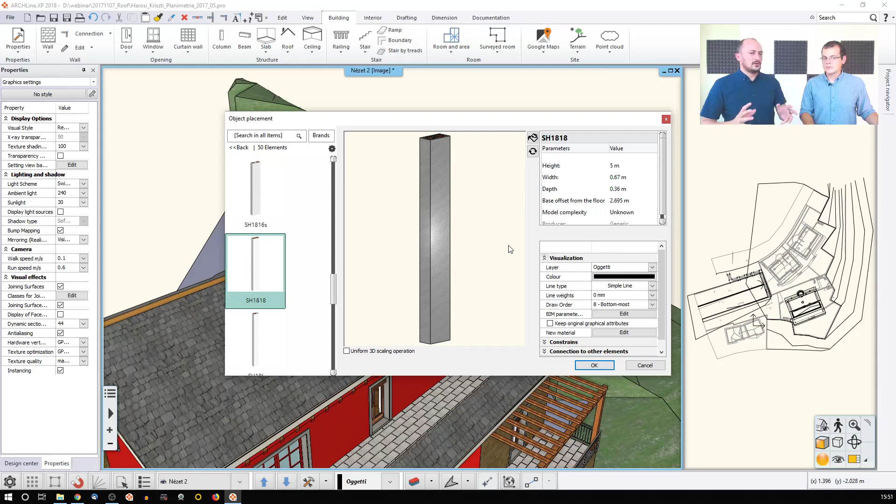What about gutters? There are two solutions again. One is the old solution using objects, but that's difficult because you have to find the proper size and so on, so that's something I wouldn't do. There's another dedicated tool called the gutter, and it's actually under the roof part.

It's called the gutter. It allows me to pick up an edge of that roof and tell it what sort of gutter, with what sort of cross section, I would like to see there. Let's say I go with this one, and I'd like to change the reference line so it's not aligned to the bottom, but aligned to the side.

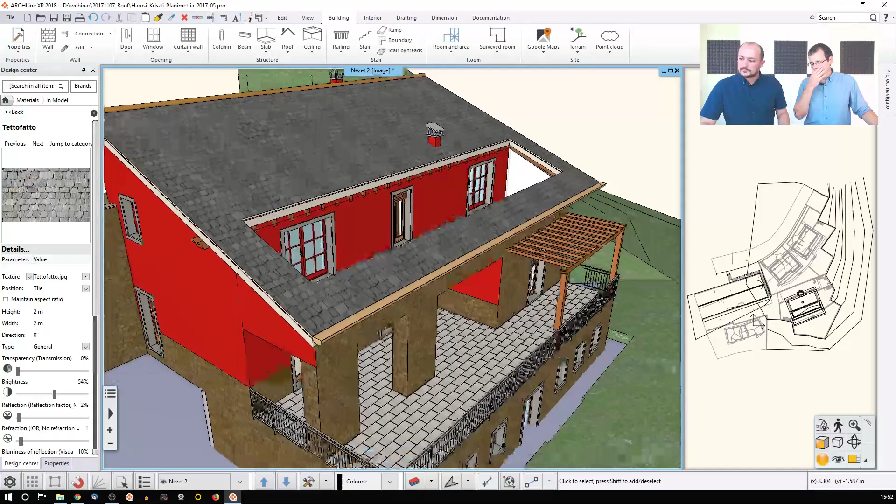I can also change the height, the width, and the offset of this whole thing. For example, I'd like to vertically shift it by its height, so it should be minus 0.15. Horizontally it should be offset by, let's say, half of the width. Now it should appear properly, and I can push it further back down or above. So it creates a parametric 3-dimensional object which you can customize.

What about downspouts? The downspout is a parametric part of the gutter itself. It's here on the second page, and by default the software will pick a path which you can change to something else, like a straight type, or another one with a slanted part at the bottom. It really depends on what you set up here, the position and so on.

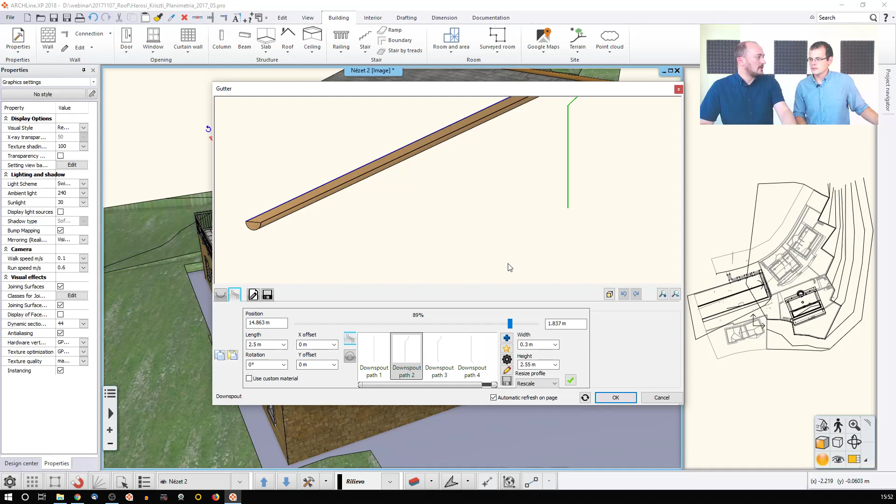But sometimes you really don't know where it should be. It should definitely not be in the center—somewhere on the side, but I don't know exactly where. So I just set it up graphically: I click create, hit OK, and then check whether it's okay. This could be okay, but if I'd like to move it further to the side, probably out of the way.

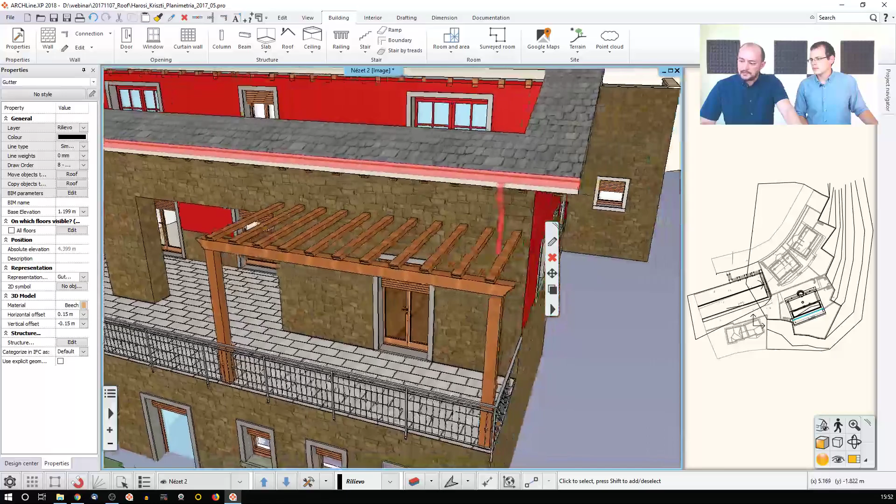Yes, I can just click here and move the whole downspout to a different position, or I can just move one segment, and even make this part longer, like this here. I just click on this part and on the arrowhead, and stretch it down. I can even type the value if I know it, or just match a proper point in the 3D.

That's right. Now another huge part of creating buildings and then roofs. So far we were talking about the conceptual phase, but there comes the time when you have to create additional detailed drawings, and with that you have to make calculations, lists, and other kinds of quantity takeoffs. So how does the software handle these?

Well, the listing is just as simple as in the other case. You can find this in the documentation part, and it's called the quantity takeoff. Whatever you have created, whatever detail in your project, the software will use that information and calculate the amounts, the length, and whatever you actually are listing.

And so now I'm just going to the quantity takeoff. I would like to create an extra list of a building part, and then I can just disable all the rest because now I'm interested in the roof, and I can even export the BIM parameters. Now, actually, we didn't talk about that, so let's just go back to that a little bit later.

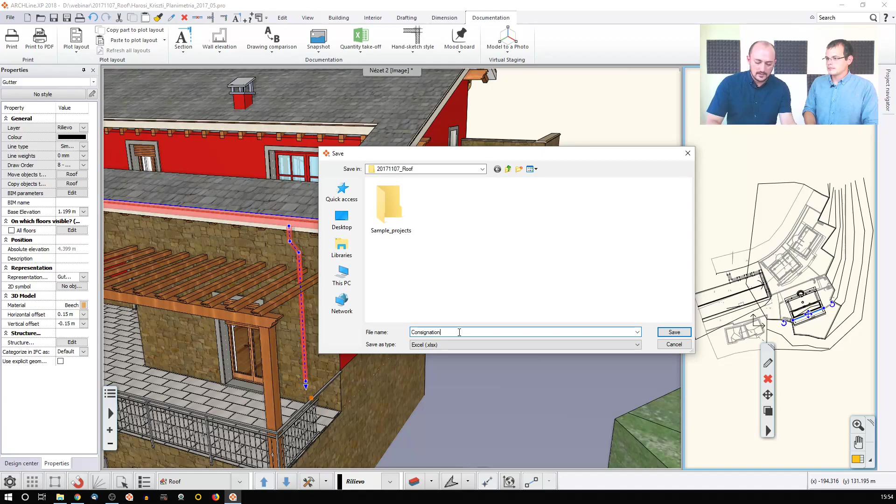So let's say this is a roof consignation, and it will be an Excel file. Okay, let's just save that. And if you have Excel installed, the software will automatically open it up.

It will always give you a summary at the first page, which is now the BIM parameters of this project, and then here come the numbers. You know, the size, the surfaces of the roof, and all the details, the beam numbers, and the lengths, and the cross sections, and so on.

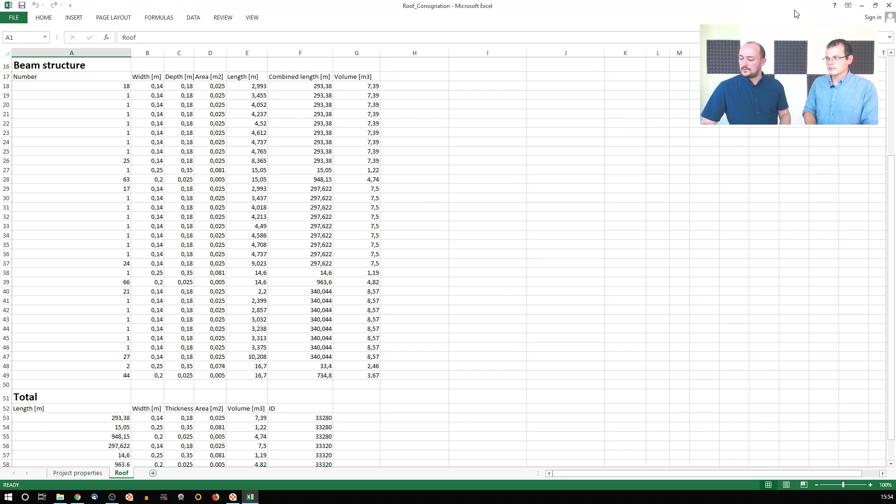This you can use for any sort of calculation that you would like to use, and that's needed by the government or other bodies. You briefly mentioned BIM parameters, so let's just talk about that for a second.

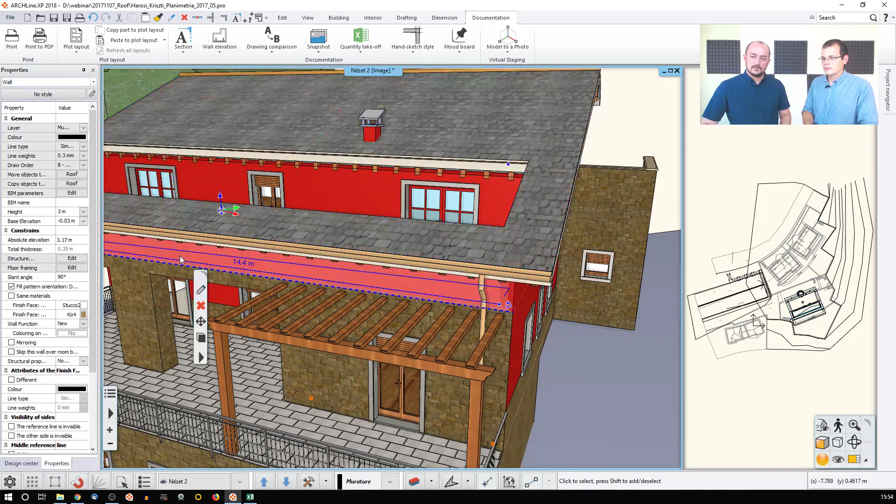Yeah, the BIM parameters are easily located by just selecting an item, and then you can just click on here, the BIM parameters. All the items having BIM parameters are appearing here, so even the walls and roofs and the windows can be found here.

You can just click on BIM parameters, and you can either simply check the BIM parameters, or you can add new BIM parameters, change them, or this is where you will see BIM parameters created in another software and imported as an IFC file, and you can further edit it.

So that's again for data exchange, because creating something is just one part of the story. You have to equip it with data which others can access. Yeah, so it's not just a drawing, it's a building part.

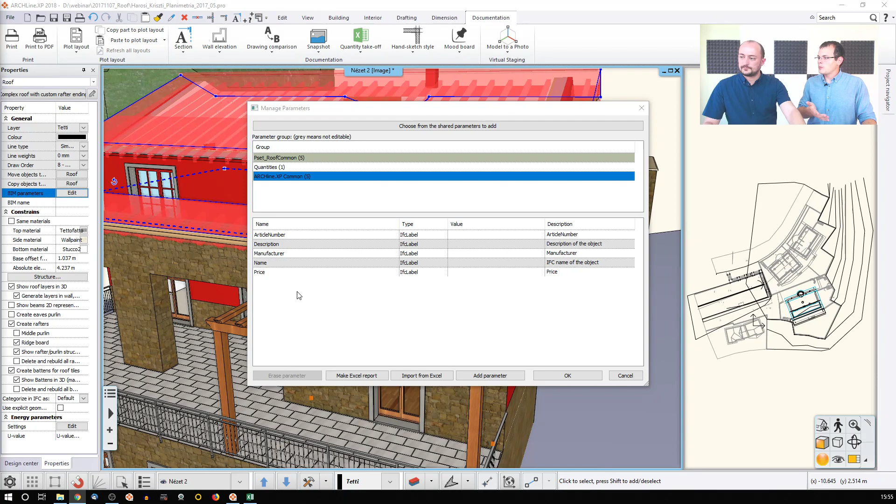So that actually summarizes what we wanted to talk about during the first session of how to create the roofs, the basics, the essentials. And knowing this, you will be able to embark on the second stage, which would be mostly about the structural elements.

So this Thursday, in 2 days, on the 9th of November, we are going to talk about what's under the tiles, really. How you can shift and move the battens, the rafters under the roof, and superstructures and roof windows even. So every single detail you would need to know about, this is what we will cover in the following session.